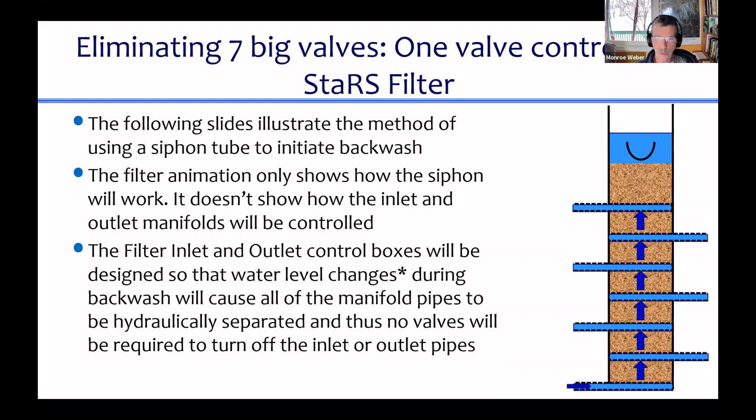And as Patrick knows, not all filters in real life are actually using our intended design. Some of them, the operators are still effectively using pipes as valves to turn inlets off and on. But the system is designed so that it can be operated with just one single little valve if all goes well. So here's how it's supposed to work. We'll watch this a couple times before it actually makes sense.

This is a cross section of the filter, and I've gotten rid of a lot of the details that I didn't feel like drawing over and over again. So it doesn't include all the inlet and outlet pipes. It doesn't include how the backwash water gets in. It's just the filter box missing all those pipes and showing what's happening to the siphon that is used to either hold the water in the filter during filtration mode or dump the water during backwash mode.

So let's go back. This is where we just ended backwash. And we're going to go through the whole cycle so you'll see how this all connects together. At the end of backwash, we've done something so that this siphon here is full of air. We did that by opening up this valve and letting it fill with air. And then that valve is closed and it's full of air.

And now we're getting ready to filter because there's no longer any water flowing through this siphon pipe because it's now full of air. So the only place for water to go is into the filter box and then out the outlet. But the outlet is up much higher, and so it can't get there yet. And so the only thing it can do is raise the water inside the filter box.

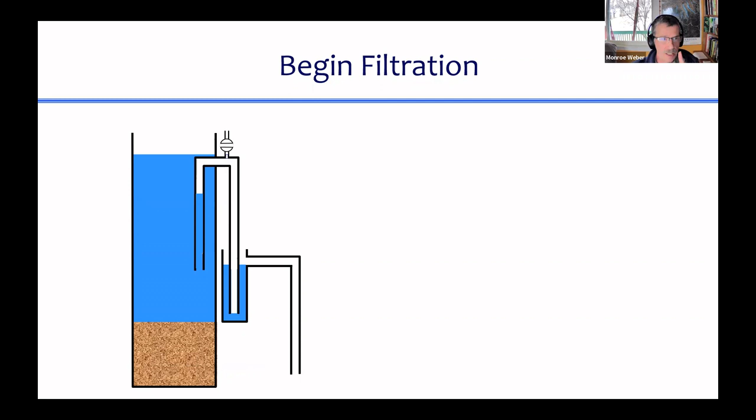So anybody want to ask a question? I see some puzzled looks, but let's continue on. We'll go through the next one, and then maybe it'll all start making sense as you see how all these cycles fit together. Okay, they go so darn fast. What just happened? Oh my goodness, let's try that again.

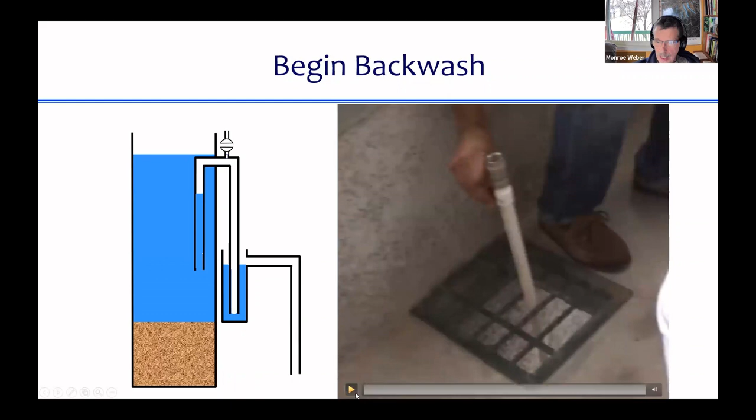So now we're going to begin backwash. And so now we're where we were at the end of last slide. And now a couple things happen really fast. So first of all, this operator is going to open up that valve, 15 seconds roughly, and then close it. Wasn't that exciting? You saw absolutely nothing interesting, right? All he did is open up that valve for a little while and then close it.

This is what was happening. He opened up this valve. And what do you know about the pressure of this air? Is the air in this pipe greater than atmospheric pressure or less than atmospheric pressure? I see one finger pointed up. It's greater than atmospheric. Remember, when we come in the water and we go down, our pressure increases.

And then we can slide across here. And that means that the pressure at this point is greater than the pressure at the top. It's greater than atmospheric pressure. So the pressure everywhere in that air chamber is greater than atmospheric. That means that when we open up this valve, air comes out. And indeed, that's what happens.

So let's do it again. Air comes out, and the siphon starts because we got rid of the airlock, and very quickly it drains the water level in the filter. And that was the beginning of the backwash cycle. We even fluidized the sand bed because of this. We've lowered the level in the sandbox, in the filter box, very quickly.

And now, because it's open to the atmosphere here, this is atmospheric pressure, and that prevents it from draining the filter any further. The difference in water level between the filter and this box here would be the head loss in this part of the siphon tube. Okay, otherwise those two levels would be the same. So now, during backwash, this water level is going to stay constant, and we'll get rid of all the dirty water.

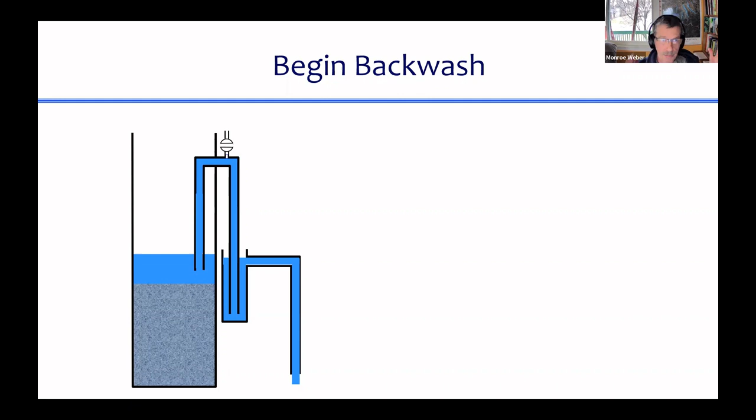So it's way below atmospheric pressure in this siphon pipe, which means that when we open up this valve, air will go in rather than water coming out because it's under a partial vacuum. So let's open up that valve. So we open up that valve and air goes in, and then we close the valve. We've got our airlock. That's going to now prevent water from escaping from the filter when we're in filtration mode.

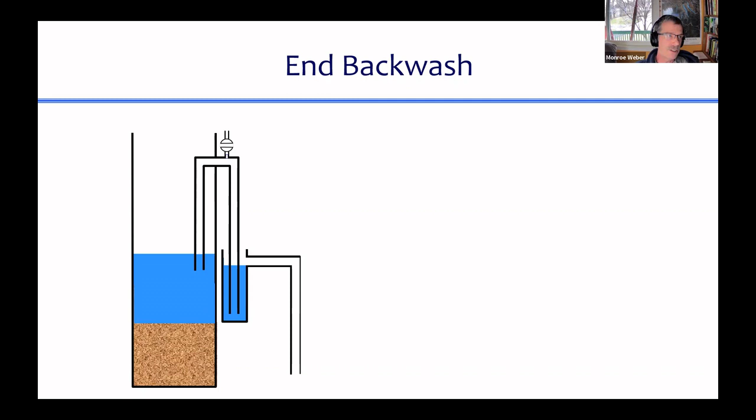By the way, this is where the myth began that if you animate something in PowerPoint, then it must be true. I'll let you decide how far you believe that.

Just for fun, I was curious, did someone else previously invent this idea and patent it, and so we couldn't use it? Which, by the way, doesn't that kind of upset you? That you could come up with an idea, you think it is original, and then someone else basically read the physics before you got there, and so it's theirs and you can't have it? Anyway, I'll let you ponder that. Happily, the person who invented this invented it a long time ago, and so it's well in the public domain.

And it's kind of funny. It was really the big flush inside a toilet. So this was an alternative to the big flapper that is in household flushing toilets now. So to eliminate that big flapper, they were going to use this little air valve with this same idea. So I guess number 9 is that little air valve, and you were going to reach into the toilet tank and turn that little air valve and let the air out of this air trap, and that was going to start the siphon to do the big flush.

And then after it all flushed, if it flushes all the way down to the bottom, it would actually fill up with air by itself, which is kind of cool. You wouldn't have to reset the valve. It would just reset automatically by draining the water all the way down to the bottom. That would break the siphon, stop the flush, and you'd be ready to go again. So the only problem is you'd have to reach inside the toilet tank to initiate the flush.

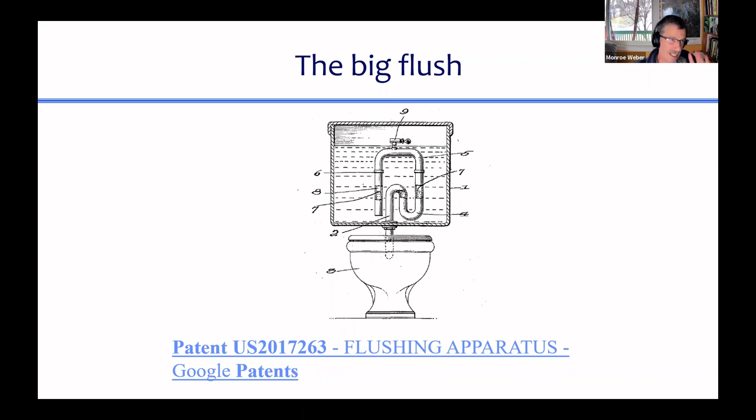I had this suspicion that this got patented and never built, or maybe built one and it's like, oh, this isn't actually that great of an idea. So anyway, now AguaClara uses this idea because we think